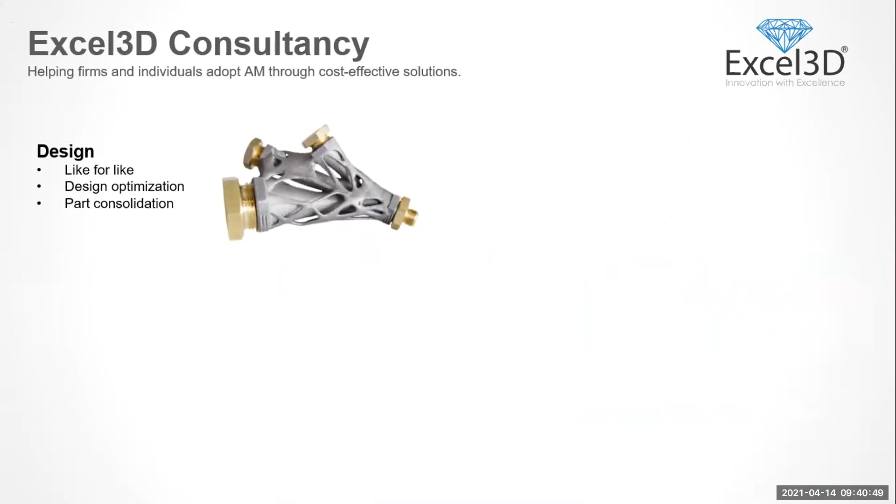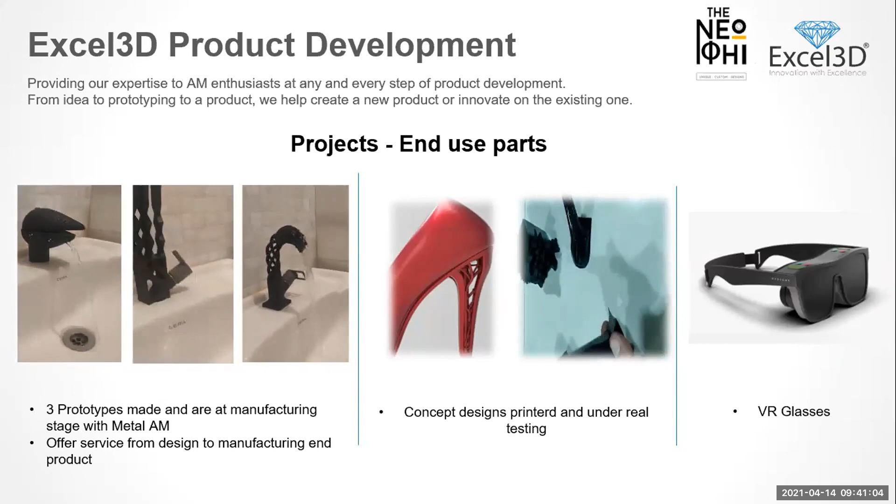Consultancy we deliver right from design, materials, manufacturing to post-processing or certifications. Product development focusing on end-use parts. So a few projects which we have been working on right now are showcased here, completely with additive manufacturing. In healthcare, as I mentioned, our first XT100 mask, which we launched last year - we did DRDO certifications. We have many more products coming in healthcare as well.

And Excel 3D Systems is about nTopology, which is the next generation engineering software, and Sigma Labs, which helps in third-party quality assurance for metal powder bed fusion. So this is what a complete Excel 3D looks like.

And what we do in the UK - we have our office in Coventry. We are partnered with Carbon, and there you will see this announcement coming soon. We do other activities such as training courses, knowledge transfer which happens from the UK, and research and development grants. We work with academia a lot in the UK as well.

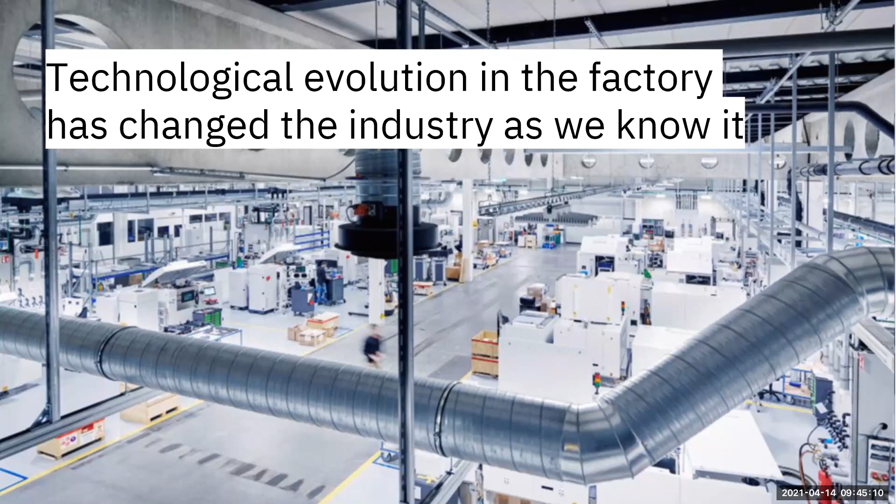But what happened on the software side is that it was stagnant. We were just happy doing CAD modeling, and we're still happy doing CAD modeling, then handing over that output to some other software, then another software, and another software. So we have this habit of using different specialized software for specialized things. But nTopology allows you to do that collaborative working much easier and much faster by cutting out those additional software you're using for simple things.

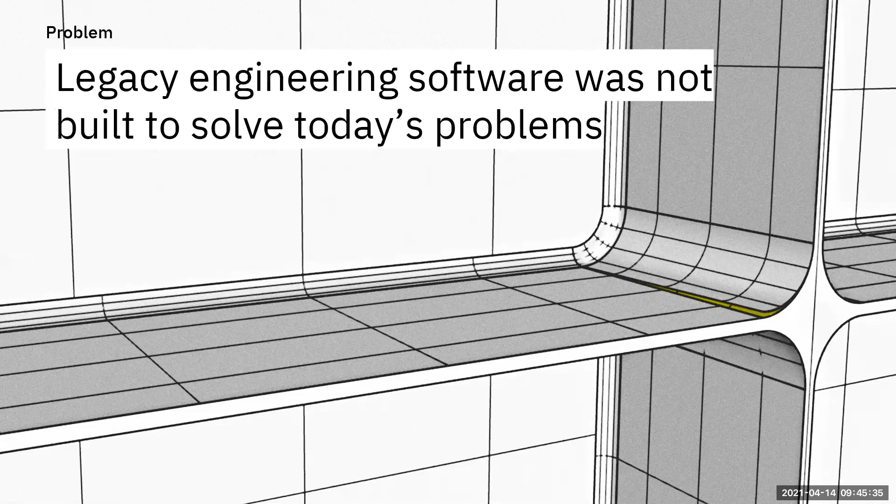So what's the problem? That's the interesting start. What's the problem with current CAD packages? I'm sure on this journey I'll be asking a few questions along the way, so you can answer and be with me. Regarding legacy engineering software, how many of you have seen this - because we're using boundary representation or B-spline methods behind the CAD packages, we always see that models are not regenerated and crash on us when we're trying to do complex operations. So it sounds complex because we made it complex - adding a fillet or adding a feature on a conformal surface, we always see this issue, and it limits innovation.

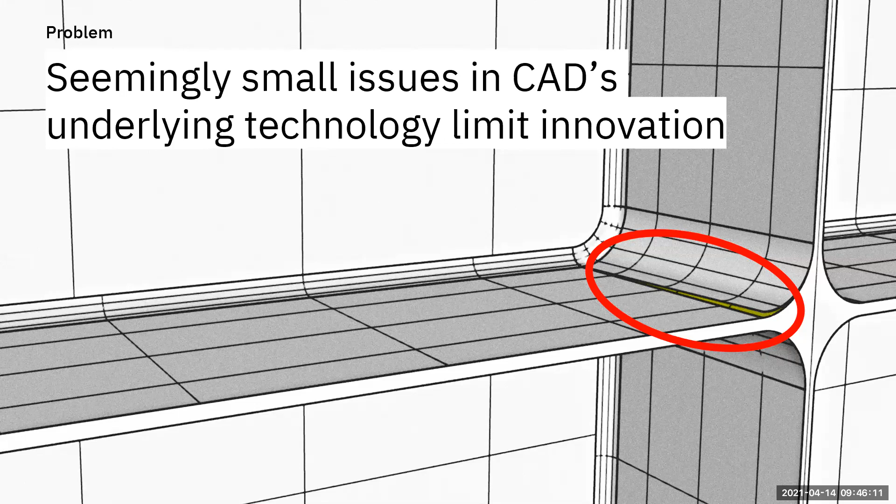When we have a process like additive manufacturing where you can manufacture more complex components, can you model more complex components using a traditional CAD package? That's the question, and that's the problem.

Coming to the solution, we have to understand what's the science behind CAD modeling. In terms of computational platform, nTopology is a computational modeling platform for design, simulation, and manufacturing. You might say, I have NX, I can do modeling, I can do CAM, and send a part to a CNC machine. But can you do that for additive manufacturing that easily on polymer, composites, or metal? More scientifically, maybe not.

What's special about this solution is it's a high performance software. The graphics technology and modeling technology are much more reliable when designing complex geometries. With the workflow here on screen, you go from a CAD part to a topology optimized component, then prepare it for manufacturing in terms of overhangs and all the requirements for manufacturing, then do validation again, and then slice and print the part. That's the journey, and what we see here is the automation and integration of manufacturing knowledge into your CAD tool, which is not present in any other CAD package at the moment.

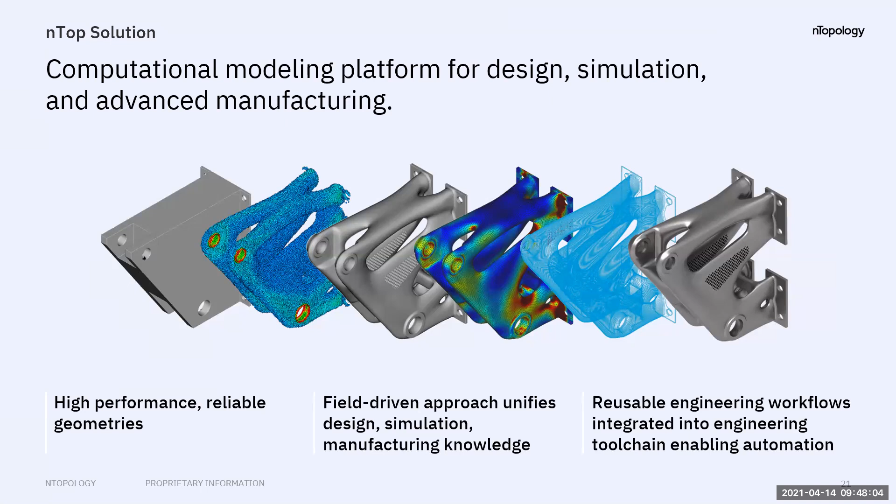Otherwise you have to go through Magics or something else, where you have to perform a lot of other things. We're not saying nTop will replace NX or Magics. It's giving you that collaborativeness, and it's allowing you to use the workflow again and again. So if I work on this part and tomorrow I'm on holiday, I just save that workflow and pass it on to some other engineer before I go, and he will be able to perform the same workflow on a different part. We'll see that automation today when Pranit explains the software.

It will be much clearer to you. So you might be thinking, we know this, this kind of workflow is flagged by everybody. So what is actually different behind the technology? Let's look deep down at the detail level.

What is legacy is boundary representation as a feature, where we have a point and we map that point all over the boundary. So we're always limited by the parameters we have to hand, and that way we are creating these patches, and we have so many variables there.

With nTopology, we are doing implicit representation. It's a mathematical representation, so you have an equation for a shape, and you can manipulate that very fast and easily, go inwards and outwards, and you don't have this patching problem. That's why it says design without boundaries, and that's literally possible.

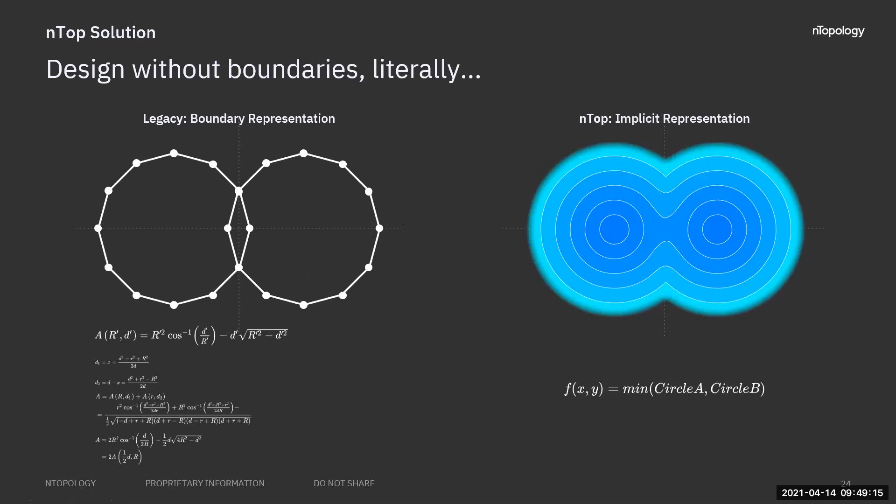We'll see today when Praneeth starts showing some features, very simple ones to start with. But the problem becomes more complex when you start booleaning things, offsetting things. We're doing shelling, or a lot of people from automotive do shelling, ribbing, booleaning, subtracting operations. But it's very complicated because even a simple circle was very complicated.

When you start booleaning two circles or two cylinders together, this issue happens where they meet. The software doesn't understand that it has to get rid of these two points here, and that's the problem. It's very complicated, and we start seeing stitching issues, or the feature recognition tool fails and can't regenerate the model.

And this is a science. I'm not saying it's a bad science, it's a science for the past. We should look to the future now where it's very simple. We can have a circle A equation, circle B equation, and you take a min of it, and you have the geometry where you have a boolean as well as you can fillet the boolean.

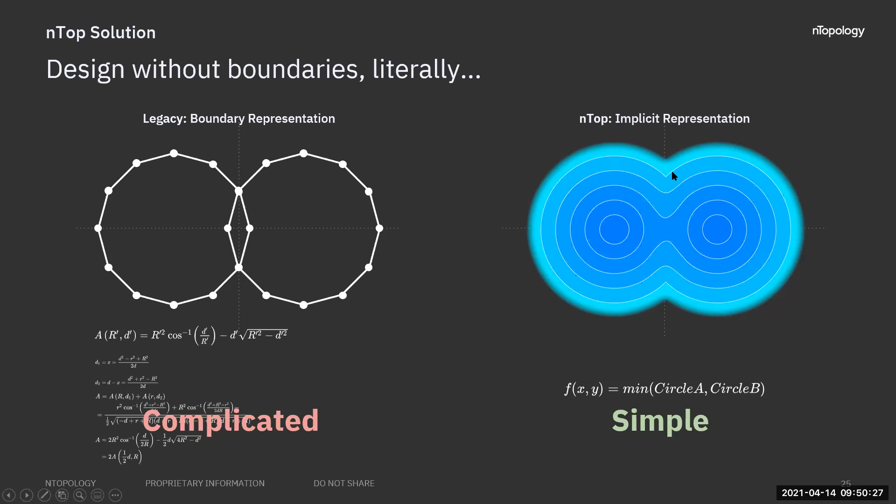If you are already a CAD designer, you might have seen that when you apply a boolean and then try to give a fillet to the sharp corner, I'd say 100% it crashes if you try to do that instantly, or it will take 15, 20, 30 minutes. With nTopology, it takes seconds. We'll look at that in a demonstration.

That's what I was trying to explain here: it's unbreakable geometry. No matter what complexity you have, no matter what size of fillet you want to apply, no matter if you accidentally punch in some values where the whole model would crash, it won't happen. It will still deliver in seconds.

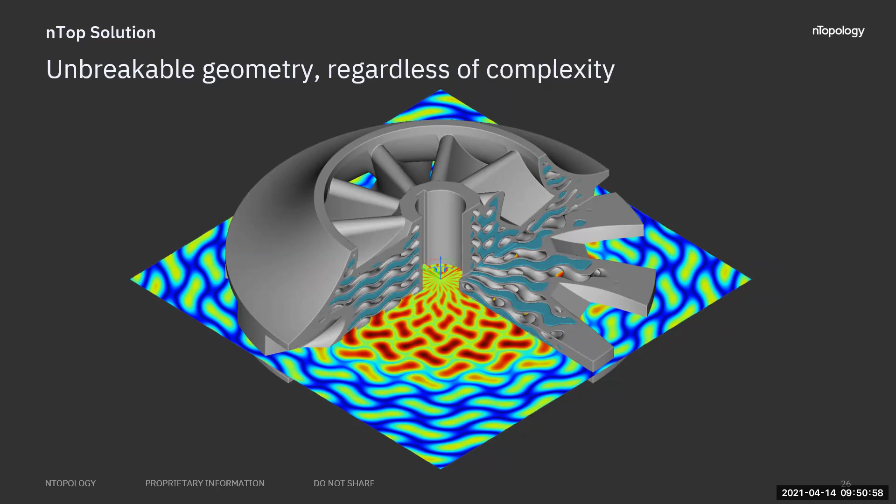And the way it does it is a very unique technology on the hardware side, the way it accesses your cores, your graphics card, as well as on the modeling side, where you can apply very different features and parameters to it. So today, as I said, I don't want to make it a complete nTopology demonstration. I want to give enough time to Praneeth as well to demonstrate the story behind the part.

So what we will look at today is these particular things here, where in structural optimization, we as an industry use Altair, we use ANSYS. There are so many software packages, Fusion, Inspire, for topology optimization. So when we do topology optimization, we know the loads and boundary conditions and our design goals, that we have to reduce the weight and achieve the stiffness, or do wall optimization, shell optimization. So in this particular package, you can do topology optimization.

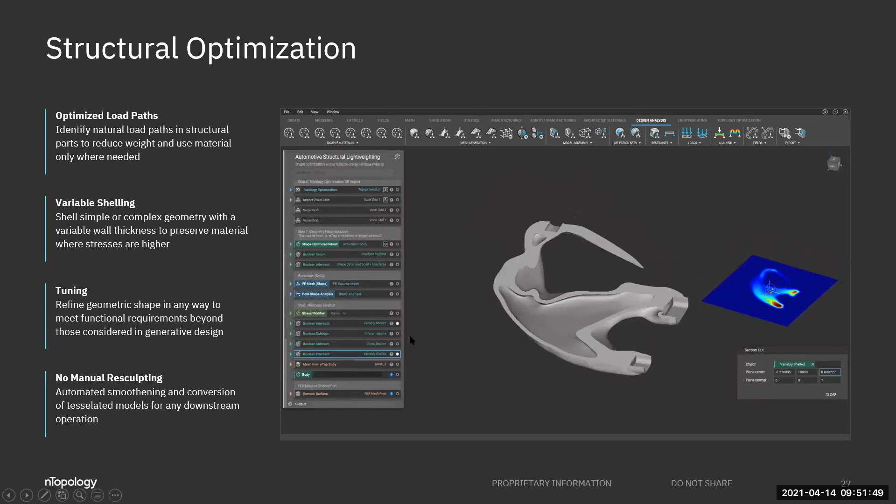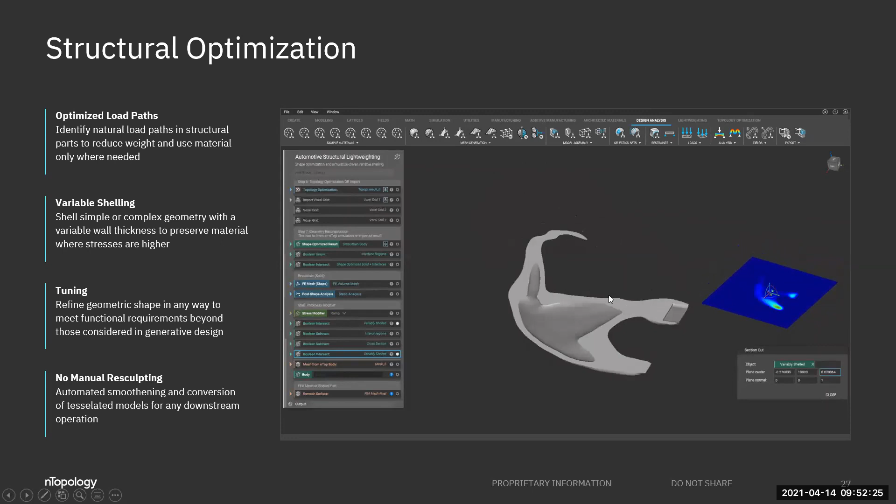But going one step above, or next level up, is that you can have a variable shell thickness based on your stress map. So if your stress path or load path is showing that certain areas have significance in the component, then you can shell the part variably by using just the result from ANSYS, Abaqus, whatever simulation package you're using. You can bring that stress map here, and also nTopology has got its own simulation engine, which can do linear structural, thermal, modal, buckling analysis. And those results can be directly used to influence that shelling operation.

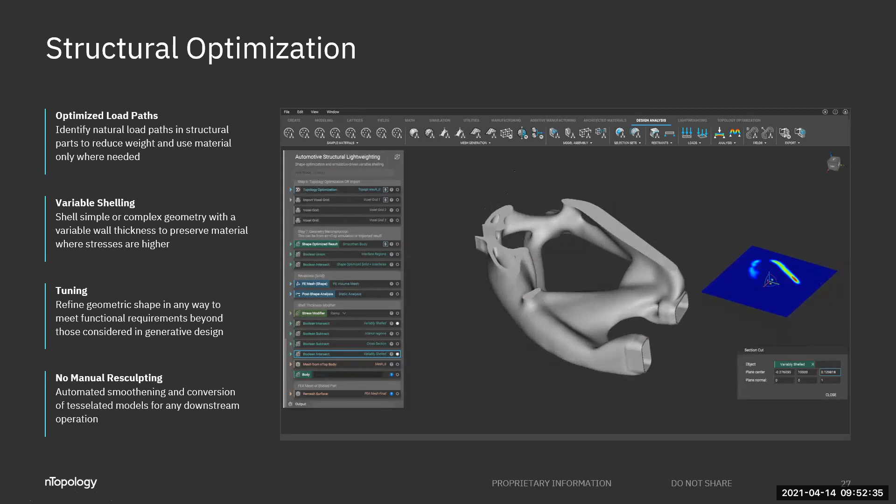And I don't think this kind of feature is available in any other CAD platform, which can do things in minutes, not in hours. And that's the interesting part, because that will influence designers to design very fast and with confidence. So now let's look at some examples. We understand the science behind the software. Let's look at some implementations. So I have kept this very brief, not biased towards these industries, but I like these examples to talk about.

So the first one is aerospace, defense and space applications, where we have tailored material properties. We are very specific. We know what we want. High stiffness required with lightweight structures and multifunctional optimization. So the example we are seeing here is a CubeSat structure, and it's optimized in nTop in 4 hours. And they both are additively manufactured. The difference between the left and right is 50% weight saving and increased stiffness by changing material. So first, they made it in aluminum, but then with the topology design capability, we could switch material from aluminum to Inconel, which is a stiffer material and can take much higher temperatures, and still achieve the weight reduction.

So again, that's the empowering feature of topology, allowing people to get rid of the extra weight, but also optimize structures, or as I said, multifunctional optimization can also combine things for you to do the higher level calculations outside nTopology. So you don't have to do everything here. You can export the meshes from here, go to ANSYS, come back. So there's a very seamless integration with ANSYS and other CAD packages, simulation packages to do this optimization, get the results and optimize the structures.

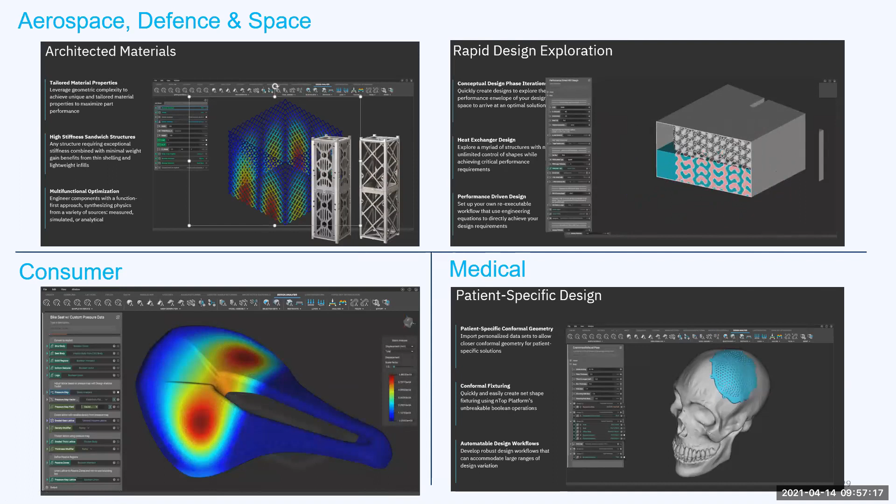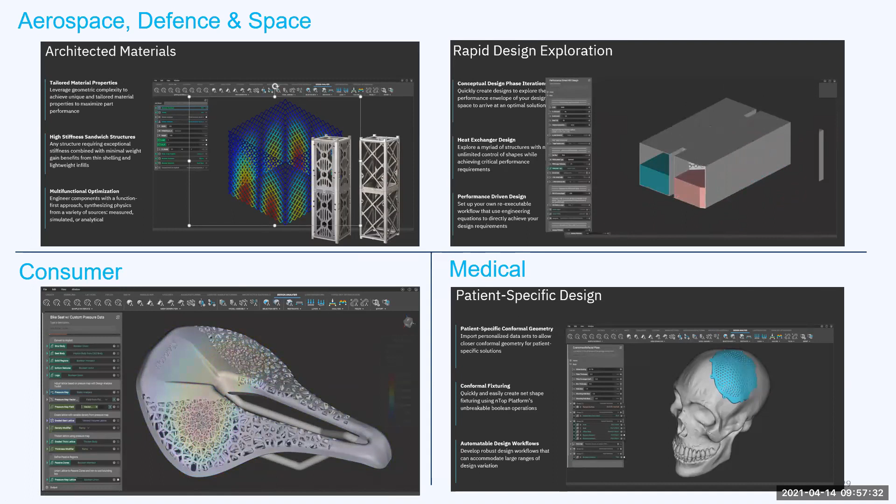So these are the success stories, like some examples. I could put more slides, but these are top level things which I like to put forward today for you to think about and see if you have anything similar to this where you can use this software. So we are talking about automotive applications today. So we'll try to focus on one sector today, and we'll bring more stories to you in coming months.

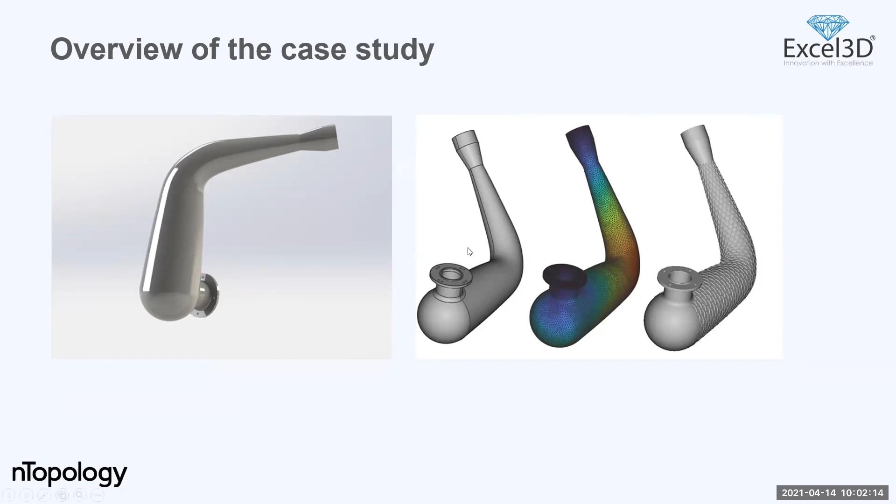So the basic design constraint for us was that this is the Formula Student SAE competition. There was a rule to minimize the power since it's a student level competition. So they had a restriction of having a 20 mm restrictor between the engine airflow from the throttle body. So this was a challenge for us to optimize that 20 mm restrictor and achieve an optimum power level.

Based on our analytic calculations and CFD analysis, we had to get a maximum mass flow rate and also calculate the minimum pressure drop across the restrictor. Since we had a 20 mm restrictor, as you can see after the silver foil, there is a narrow region. So it's a restrictor there, and it's a Venturi type restrictor. Based on some diverging angles and converging angles, we tested it analytically on software to obtain a proper pressure drop.

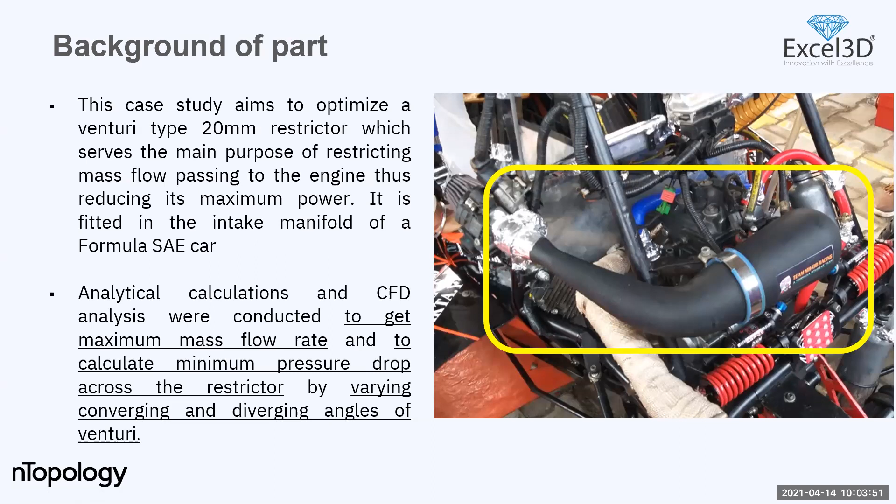So the main design challenge, as I already said, was the 20 mm air restrictor. The main objective was to optimize a Venturi type restrictor design to allow maximum possible flow rate throughout the engine without any losses, like reducing the difference in pressure across the Venturi at all speeds. As you have seen how it is designed and how the angles are closed, which can lead us to various air losses and improper fuel atomization, stuff like that.

So based on that, we had to optimize it properly using the Venturi and also the flow of the air, so that the air goes at a proper speed towards the engine and we get better performance with the restriction of 20 mm. The major constraint was the 20 mm intake restrictor, which limited the power. And due to that, the engine revolutions were also controlled from 10,000 RPM to 7,500 RPM.

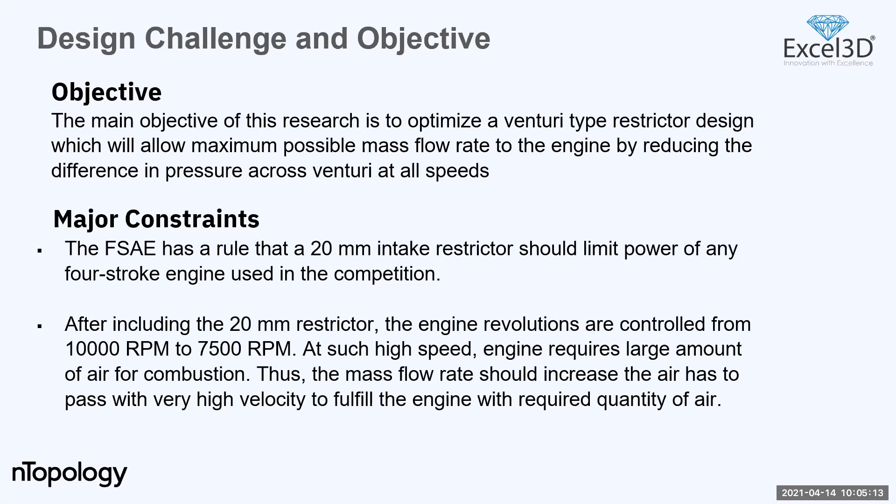At such high speeds, engines require a large amount of air for combustion. So we had some constraints like how much air should be stored in the air intake itself for ideal conditions and what the mass flow rate should be. Based on that, we designed the product. After testing, as you can see, we had real time testing on the car itself for our various competitions. On that, we found some drawbacks of the part itself, and based on those drawbacks, we had some challenges to attain the design goals.

The main design goals were better air fuel atomization when the engine is in idle conditions. Second was minimizing the restriction to air flow. As you can see, this is a Formula SAE race car. So to avoid breakage or leakage when the car flips, the air intake has to be kept in an enclosed envelope near the chassis with closed angles, so that when the car topples or rolls over, the air intake doesn't break down and doesn't blast. Therefore, we had to design it very close to the chassis.

Thirdly, the reduction of component weight. Since we had to avoid this breakage, of course we built the wall thickness more, and due to that it has more weight. To avoid that weight, we had to reduce the component weight. Further, we are trying to develop this in a titanium material so that reducing the metal also helps us.

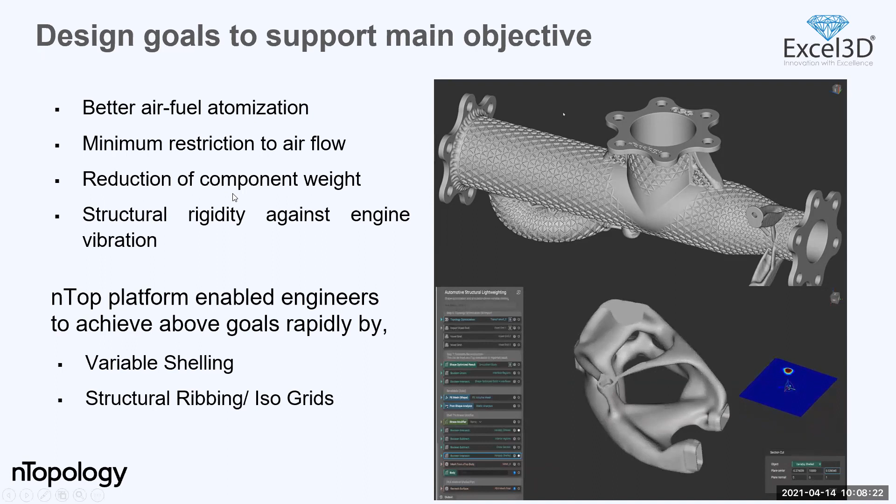Similarly, structural ribbing, isogrids or latticing, as you can see in the first image, will help us obtain structural rigidity without compromising its structural strength, and also help us reduce component weight and the material itself. So just moving forward, I'll take you back to the software itself.

So before going towards the practical demonstration itself, I will just let you know the GUI, how nTop looks and what features it consists of. So this is a window, how nTopology looks. It's not like normal CAD software; the interface is a bit different.

But as you can see, this is a toolkit which we have. So here we have, as previously Kasha sir said, nTopology works on implicit bodies. So based on that, we have all modeling structures like box, which can be created directly, like box or cube, which are normally obtained in normal CAD software also. Similarly, we have modeling like extrude body, offset body, thicken body, Boolean union and Boolean subtract.

Similarly, we have a tab for lattices, like tailored lattice structures like TPMS cylindrical, TPMS spherical. Based on graphs, there are volume lattice, surface lattice, conformal lattice, and some more gyroid bodies, diamonds. Similarly, we have fields like gyroid field, diamond field, then mathematical formations. Similarly, we have simulations in the software itself, where we have static analysis, modal analysis, buckling analysis, thermal analysis, and homogenized unit cell.

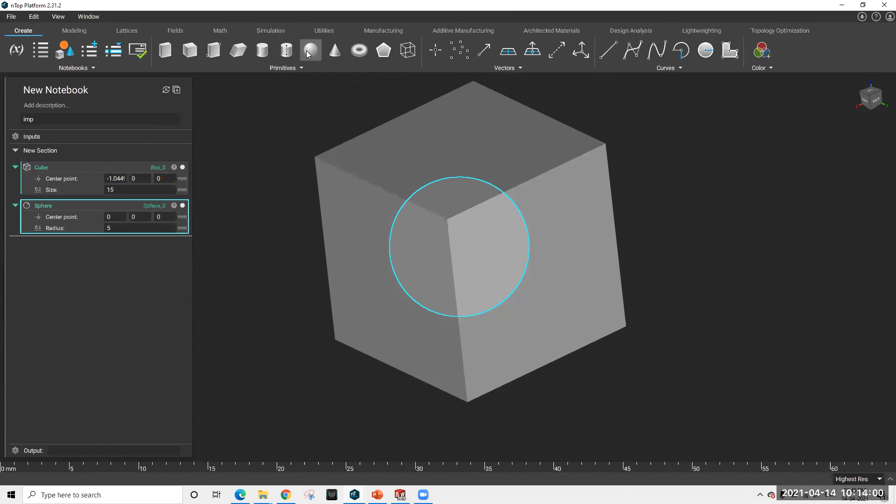If I need to change the position, I can drag from here, based on the center point I can change it over here. Similarly, I can show just a Boolean operation too. So I just pick the sphere here. So if you can see the sphere, I will just pull it out. So this is just the Boolean feature.

So that's how it is. Now I just search for the boolean union feature. So as you can see, I just drag the bodies, like the cube is already added here, and I have the boolean union itself.

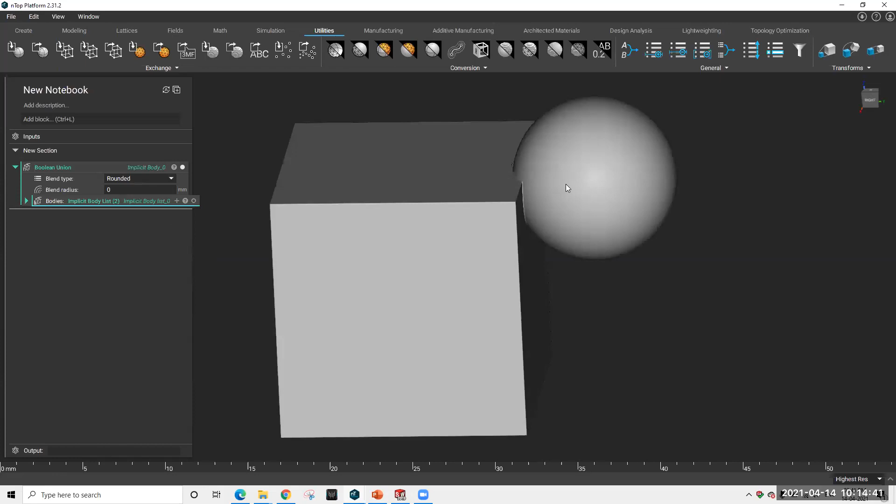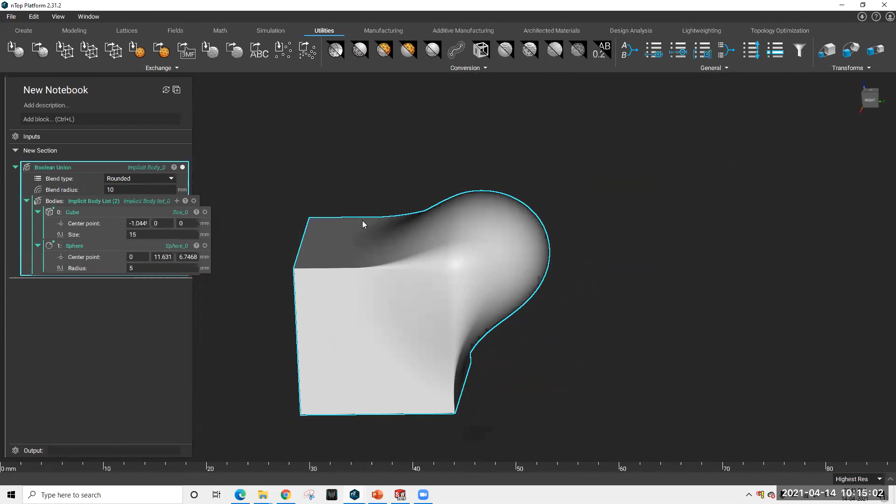We have no limitations to the design. The designer has no limit to what extent topology can go. Like you can see the length and radius, I can turn it to a level where it's impossible to create it or imagine it. So as you can see, in a fraction of a second, we have a body.

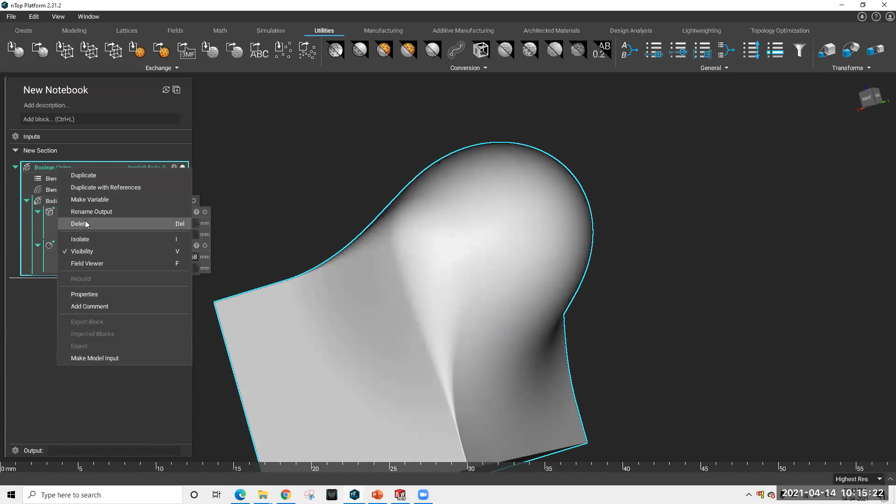Before that, mostly this was a part which we had already created, so we just had to take it to another level. So it just bridges the gap. It doesn't replace any CAD software, but it bridges the gap with any CAD software where we have constraints that this is not possible or this can't be done. So nTopology helps us there to have that feature.

There are more options, like for importing. I just go to import, and as you can see, I can have various file types like STL, OBJ, and 3MF files. Similarly, Creo, SolidWorks, Parasolid parts. So I just take the solid body part which I had made in SolidWorks and bring it over here.

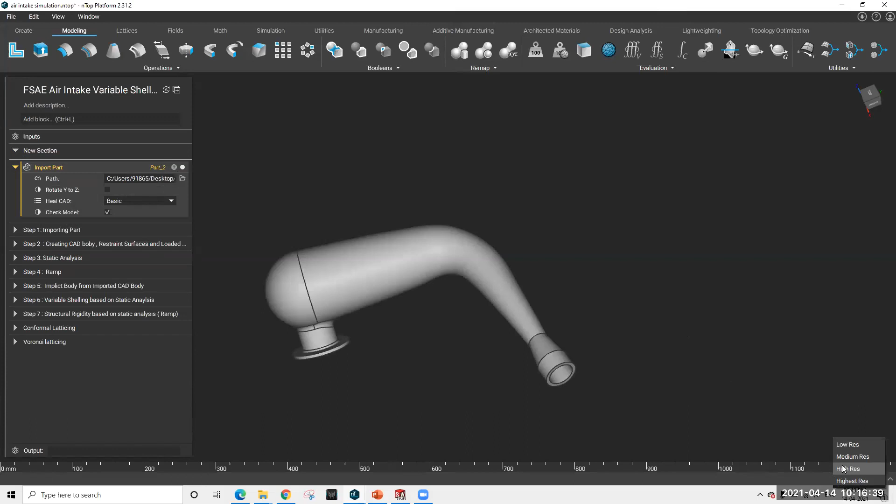Based on your computer specification, you can also optimize your performance, like having low resolution or medium resolution, so your machine can work properly. As you can see, this is an imported body part. It has edges, which means this is a CAD body. nTopology mostly does not operate on the CAD body itself, so we have to convert it into an implicit body. Once we convert it into an implicit body, we get the freedom to operate on it any way we like.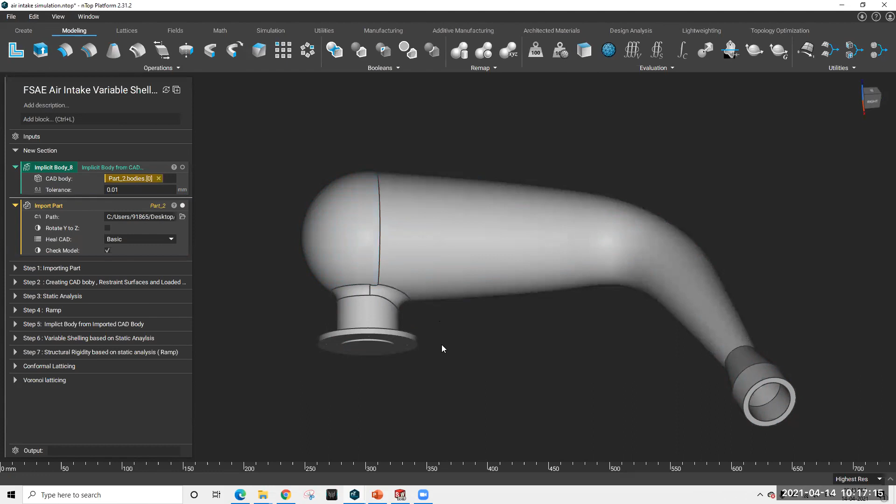So this is the imported part. There are lines and faces, so it's impossible to create where we have constraints of faces or edges. Moving forward, seeing the implicit body, you can see it's a uniform body, and since it's a uniform and implicit body, it doesn't have boundary limitations, so we can have impossible features on it, which I will show you further.

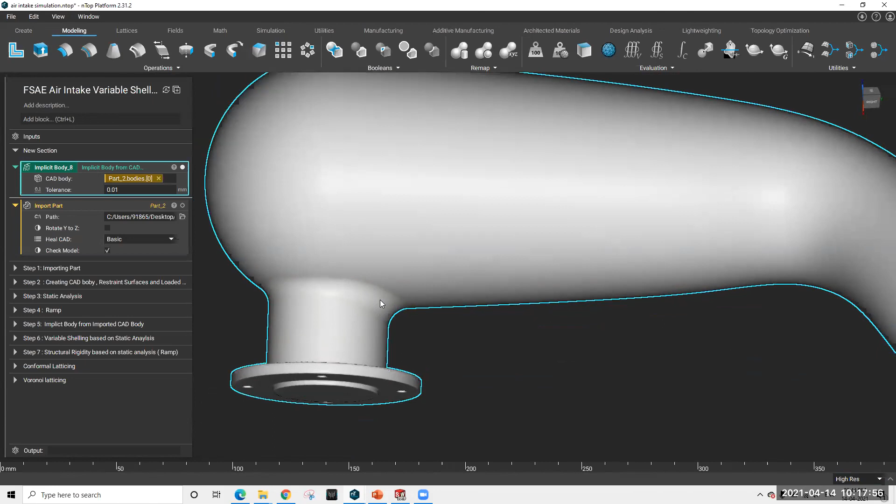So here you can see how your part's feature is being controlled or what time it may take. So you can see it has already smoothened, so it's just a single body. Based on this single body, you can apply all the toolkits, which we call blocks in nTopology terminology. You can obtain them from here, play around, and use your design and your imagination to create what you want.

So that was how we import, and you can export it in various formats like STL or STEP format, whichever you want. Moving forward, this is an already created workflow. As you can see, I have created a stepwise workflow, which means a new person can also operate it. My colleague can just change some values and get different iterations of the part rather than creating the whole part again.

So this is the first step. I just imported the part. As you can see, there are options like rotating it from Y to Z, or healing the CAD if there is any problem in the CAD faces. Like Utkarsh sir showed you in one example, there was peeling off of the faces. If there is, the heal CAD option helps us.

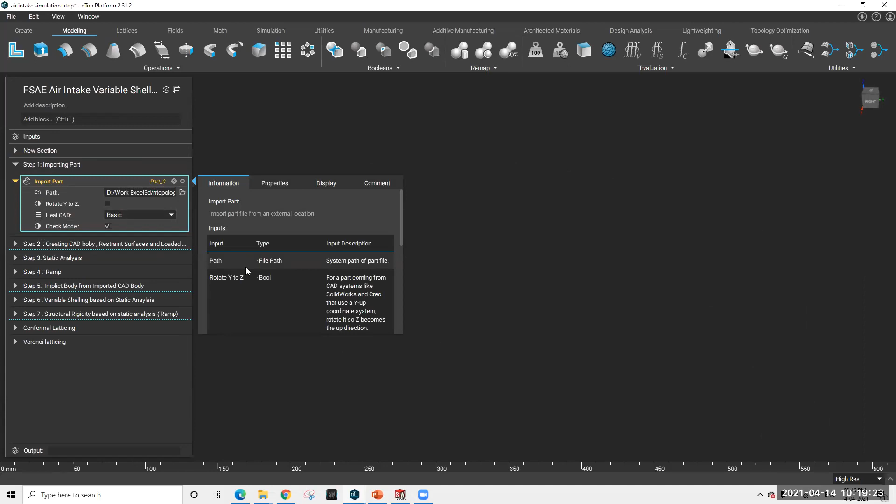Similarly, each block contains various information. In view block details, you have information like where the path is, how the model is, what properties it contains, which color it should display, or you can add a comment so other colleagues know what changes should be made here, or information regarding every feature can be added over here.

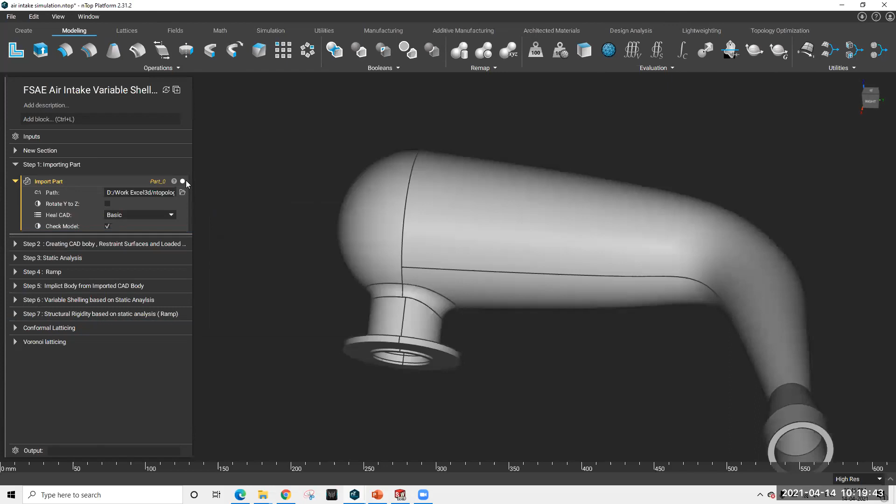After importing the part itself, we can just create it, then I moved on to creating various elements.

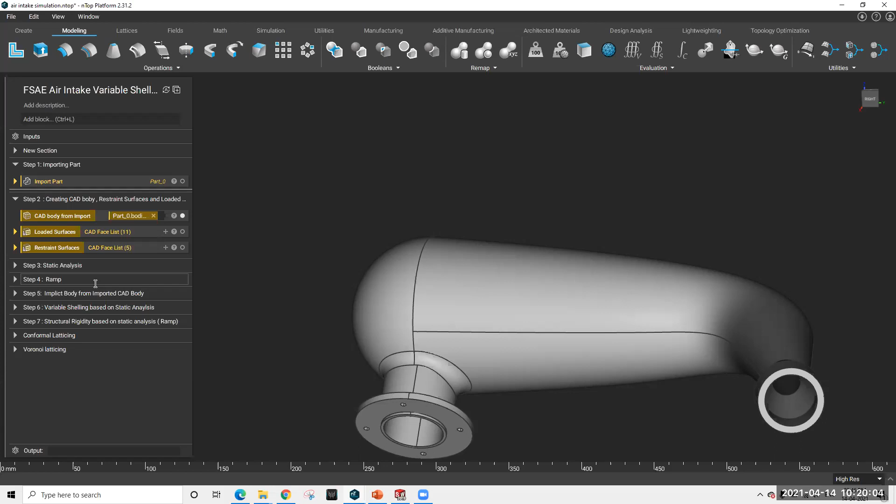I needed the basic parts, which I had to give the surface static and convert it into the static analysis. I needed some constraints or the load and restraint surfaces. Based on that, I had to create the CAD body which I needed.

So I created the CAD body from the imported part. Then I had the loaded surfaces, the surfaces which I need to load. This is the inner surface of the intake body itself, so this was the surface where I want to load my static analysis.

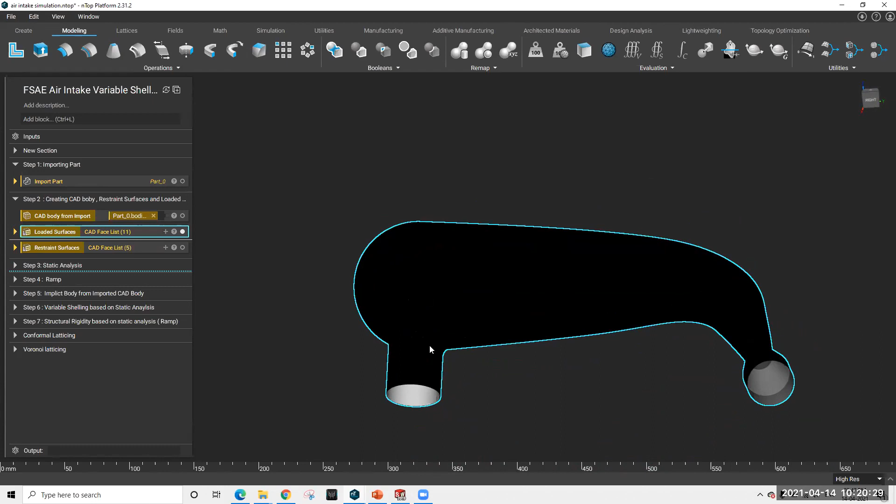Based on static analysis only, we are going to shell the body and construct the latticing itself. This is the static loaded surface. Similarly, I have a list of the surfaces which are restrained, from where to where the airflow will be happening. So these are the surfaces.

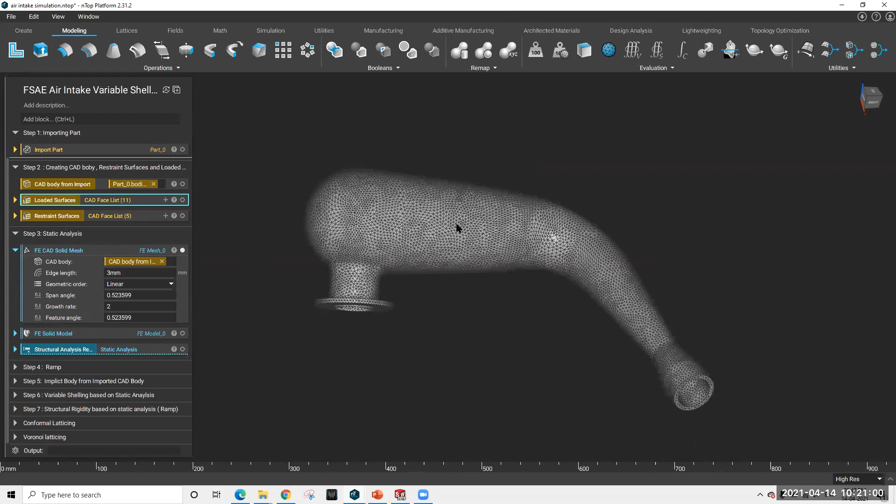Once I have this, I just move on to the hide option which will help you. Based on the nTopology, it already had its own FEA analysis system, so based on that I just did the mesh structure. As you can see, there are various mesh operations like edge length and feature angle based on that. So I had the meshing for my analysis.

Similarly, converting it, this was the mesh. I have the solid body in which I added the material, isotropic material, which is ABS, which we had already used, and the density which I just googled around. So we just added it. There are some materials already available in nTop isotropic materials, or if you need, you can add your own materials, whichever material you need, the density, the Young's modulus, and you can just add it. So this was the solid mesh.

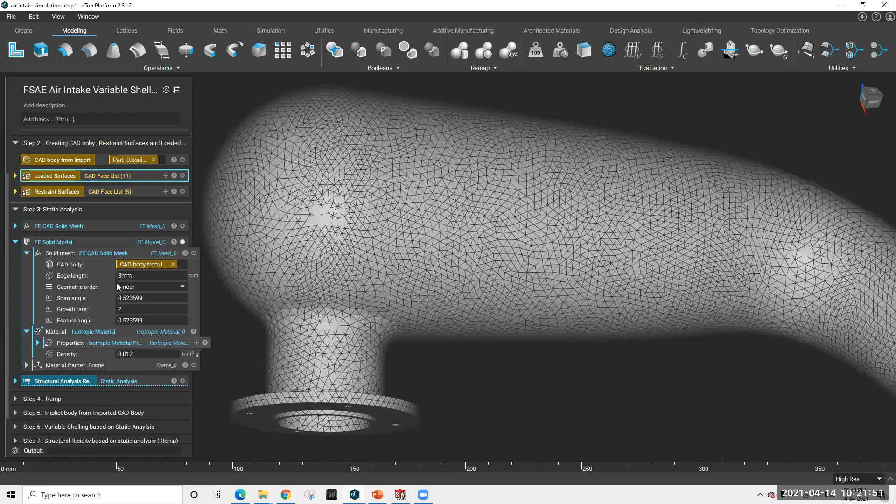Based on that structural analysis, I had created the solid mesh which we used. Then you can see the material.

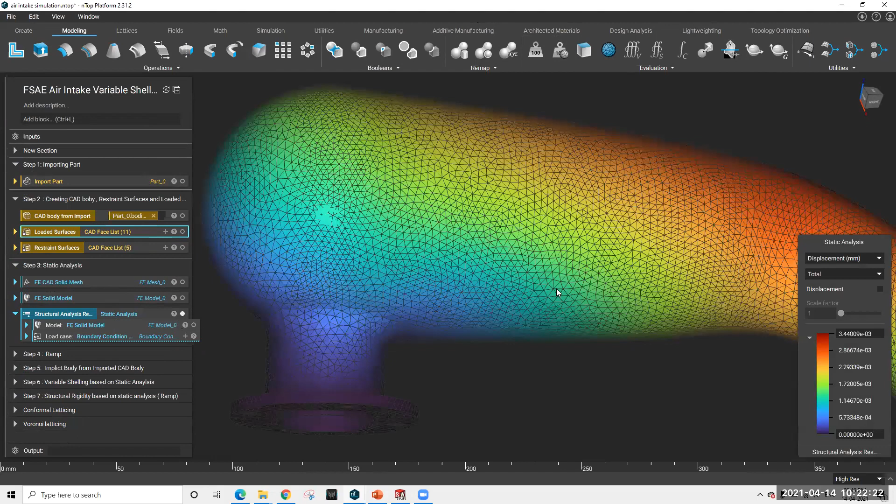Based on that, we have structural analysis, as you can see. There are various regions, so we can have displacement, strain, stress, and based on that, currently we needed the stress one mostly to dedicate the pressure where we have it. Based on this, I have the results.

I just put these results into a ramp function, where I put the input values which I obtained from the structural analysis, and based on that I have a data output which I need for my variable shelling.

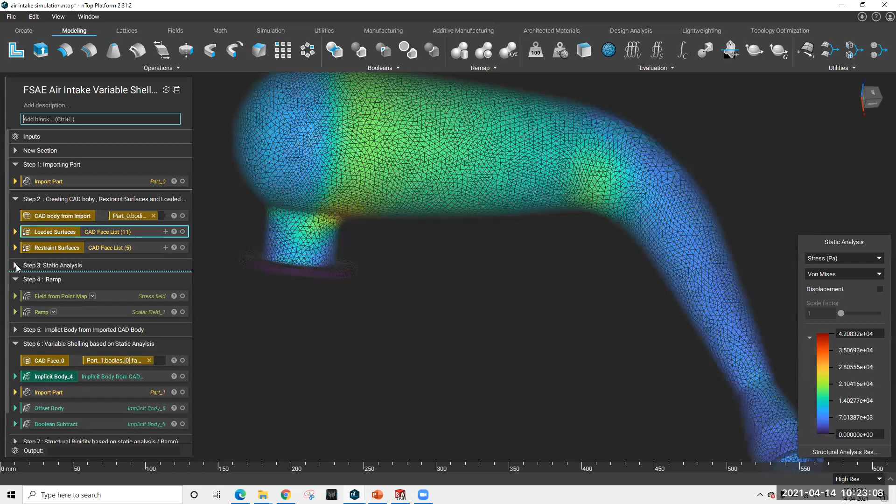Similarly, I converted the last step, implicit body from a CAD body. Then I had a variable shelling option. This is the variable shelling option.

As you can see, based on the ramp function which I have used, I just applied a variable shell based on the static analysis itself. You can also have a normal variable shelling if you need, or you can use other techniques or other fields to have variable shelling.

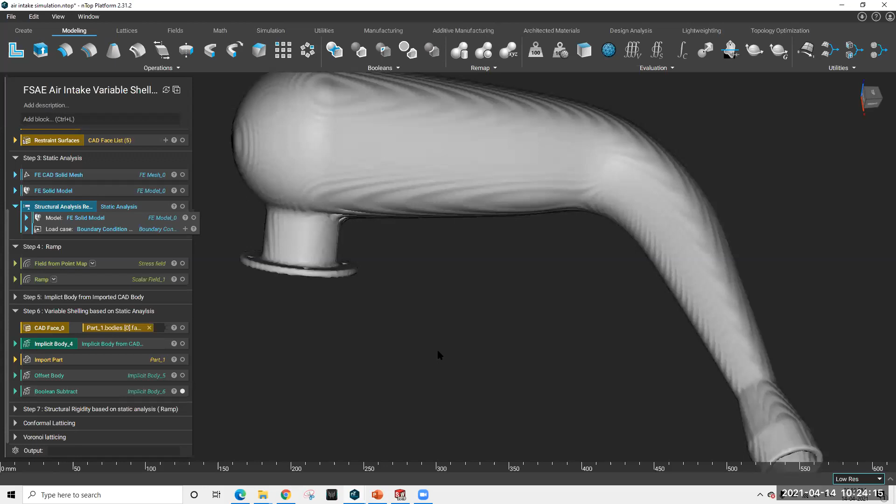As you can see, it's created the load, so there is a variable based on our pressure maps. I had given a thickness from 0.5 to 1 mm, and based on that the thickness has varied accordingly.

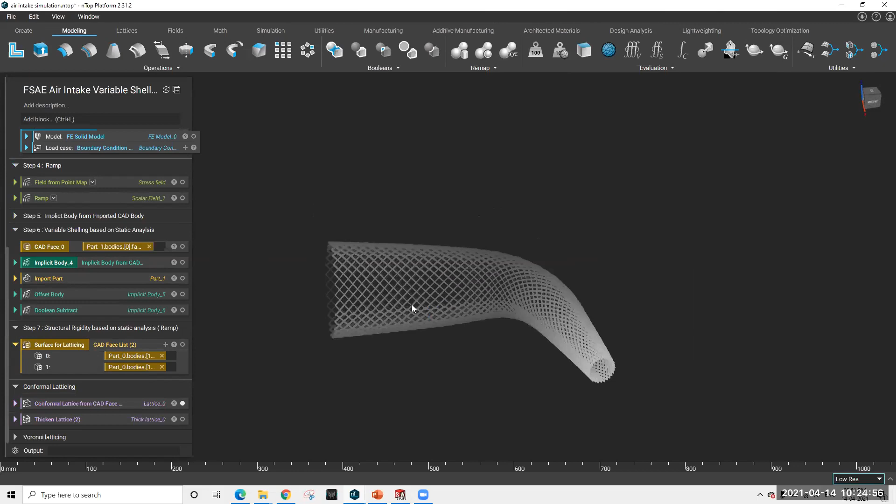So this was the variable feature. Based on the same, we have surface latticing. The surface which I used for latticing was this surface, which was important for us. Based on the same variable feature and our static analysis, I had the conformal latticing created, the lattice is created, and then I thickened up the lattice accordingly.

As you can see, this is a conformal lattice, and based on the static analysis, the structure of the lattice also changes according to it. Similarly, I had one more lattice structure based on it, that's a Voronoi structure.

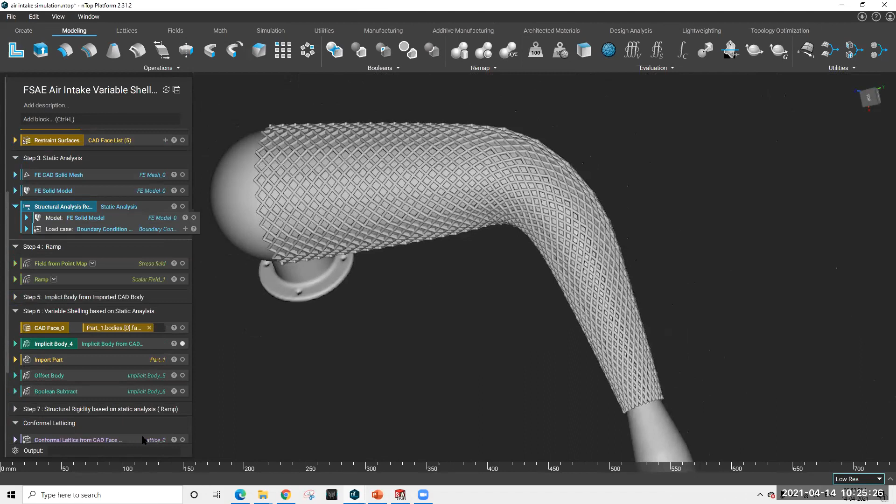So each... this was just loading, take a time.

So similarly, this was how the workflow was. Based on that, we had achieved the weight reduction and also structural rigidity for our whole workflow. We can have our output in various formats like STEP or STL if we need. In our case, we had ABS. We had 3D printed the part in ABS, so we had the STL format. Based on that, we can have a workflow.

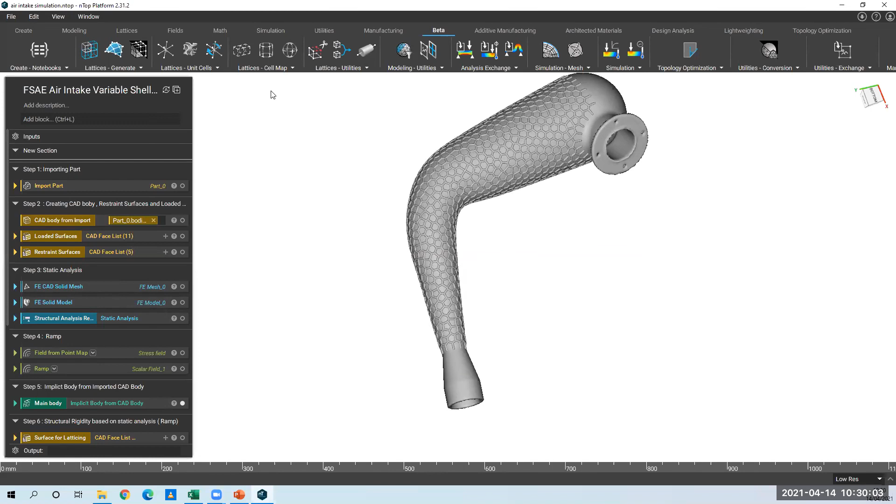The lattice structures, using different kinds of lattice structure to strengthen the skin or the structure of your part, is quite easy to do. Once you run the static analysis, you know your maximum pressure, minimum pressure and load paths, and you can influence the geometry morphing or modeling accordingly and automatically. So if I change the geometry and keep the same workflow, it will update itself in minutes. Iteration wise, even if you do 2 or 3 iterations, the time it takes is not more than a day, in half a day you can have your iterations done on a software level. But you can always go and do physical validation to confirm it.

Very good question, where can we learn this workflow? This workflow building is very easy. As you see, Praneeth has built this maybe in half an hour. You can drag and drop different things. When he was showing you the Boolean feature, he opened a box, he opened a sphere, and that's the notebook building, basically like school. In school or colleges we write steps one by one, and anybody can use your notebook to follow it. So the workflow, once built, can be shared with your team, which doesn't have to build it again from scratch. As a beginner, if you are doing topology optimization or static analysis, it has a guided workflow, training material and videos, a lot of resources available, so you can build your own workflow.

There's one question I think we missed, it's about conventional material and method for manufacturing. The good part of nTop is it's not only about 3D printing or additive manufacturing, you can also do conventional CNC manufacturing tool path planning. You can export conventional materials, you can use conventional materials databases. You can import a material file from, for example, I personally use Granta MI a lot to get material data, and I can create my own material in nTop for customized problems. So again, that's a method of manufacturing as well.